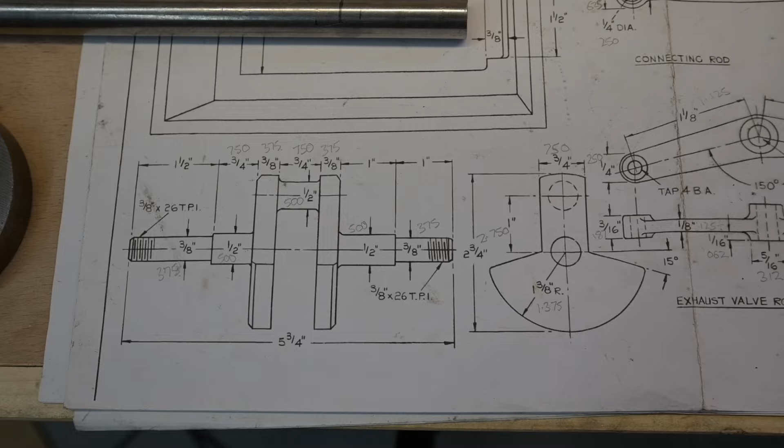Right, this is a project, or part of the project, that I've been dreading for some time. The crankshaft. This is the stock they supply. I've got to cut 1.5 inches off of the end, which forms this piece, and the rest of it will go through in one.

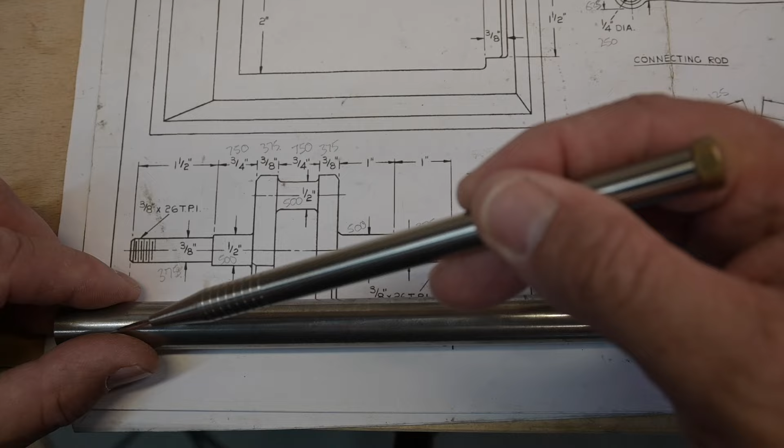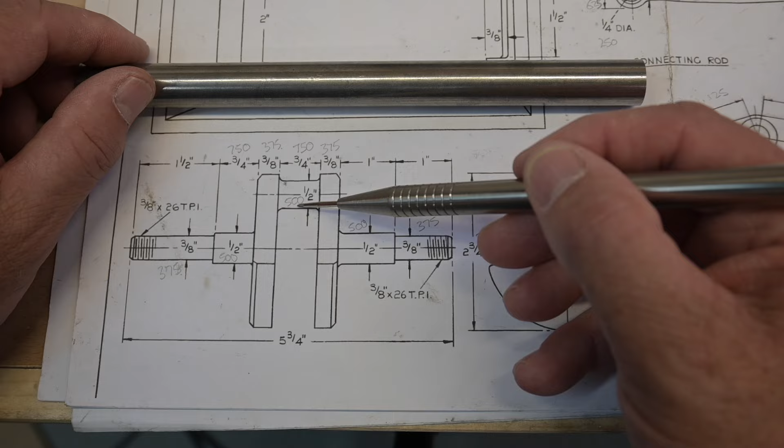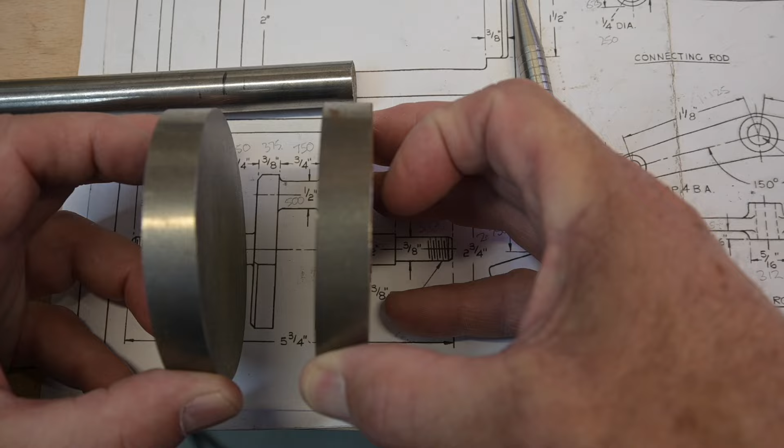Now they show these two little fillets there, which aren't going to happen, of course, purely because I won't be able to fit it together if I do it like that, unless that's the fillet of the braze that's then turned down. I can understand this one because I can leave it larger than 1/2 inch. Let's say this is the end piece, the 1.5 inches there. I'm going to leave 3/4 in the centre, turn the outside edges down to 1/2 inch, and then I can sandwich these pieces on, and that will give me my required 3/4 inch in the centre.

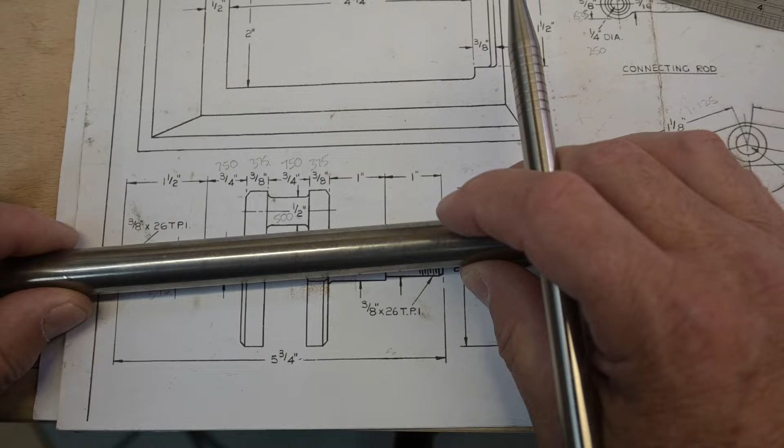Same applies to the bigger bit. I will leave 3/4 inch in the centre at full dimension, which I think is about, let's have a look, 5/8. So the full dimension is 5/8, so I'll turn it down to 1/2 inch apart from the last 3/4 in the centre, and then that will set me up a nice datum to press this together, and then I can braze it on.

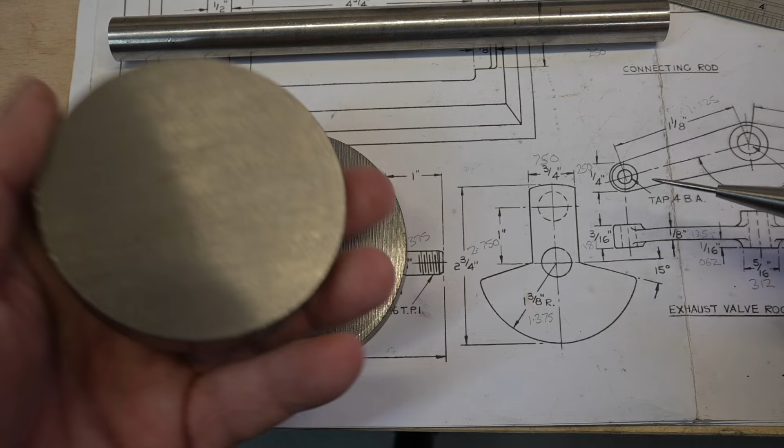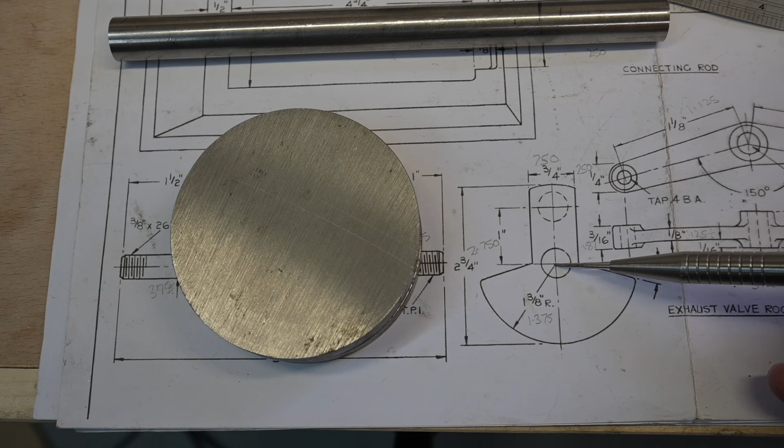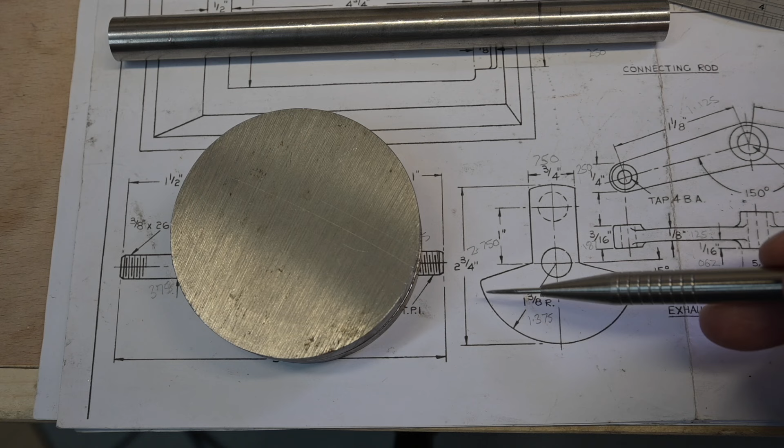But these are the two plates they send for the balance weights. So what I'm planning on doing is to just put them in the lathe, face them off, then I can sandwich them together and probably set them up in the mill, find the centre, drill out the centre 1/2 inch hole, and then another one 1 inch up, and then while it's still in the mill I can do these offset angles. I know probably the quickest way is just to hacksaw them off, but I've got to make sure they're exactly right either side to make sure the balance is correct.

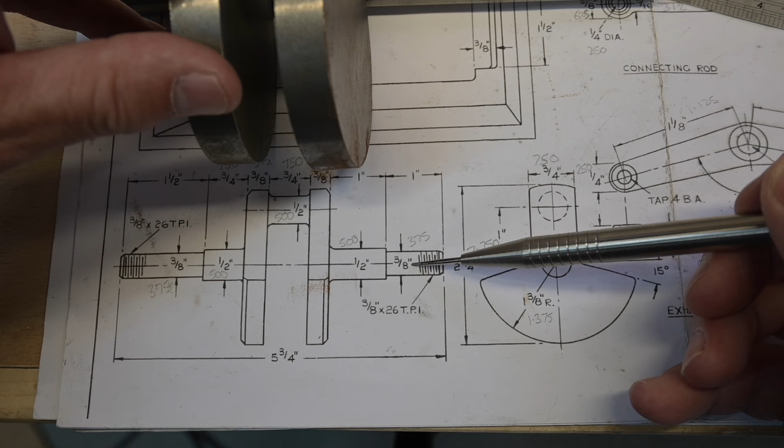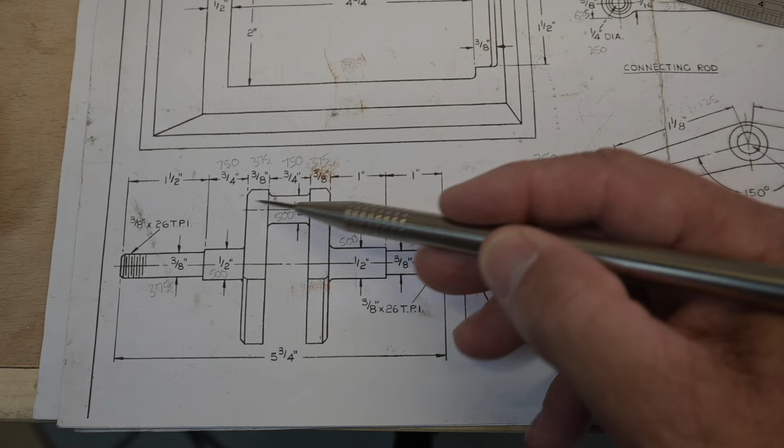So let's assume we've got these two faces machined off now. They're set up on the crankshaft, and then I'll set the crankshaft up between centres, which is how I'm going to do both of these, to keep the concentricity. So once they're set up at 3/4 in the centre and all brazed together, I'll put them back in the lathe and turn the outside. I know it's going to be an interrupted cut, but I'll just true up the outside relative to the crankshaft going through, and also face off the insides down to the dimension, because they're slightly over. Even when I've faced off one side, they'll still be slightly over, but the face side will be on the inside, and then on the outside I can machine them down to the required dimension.

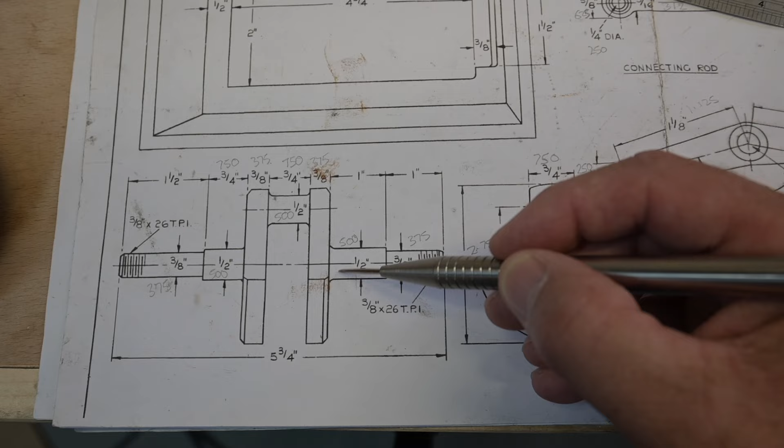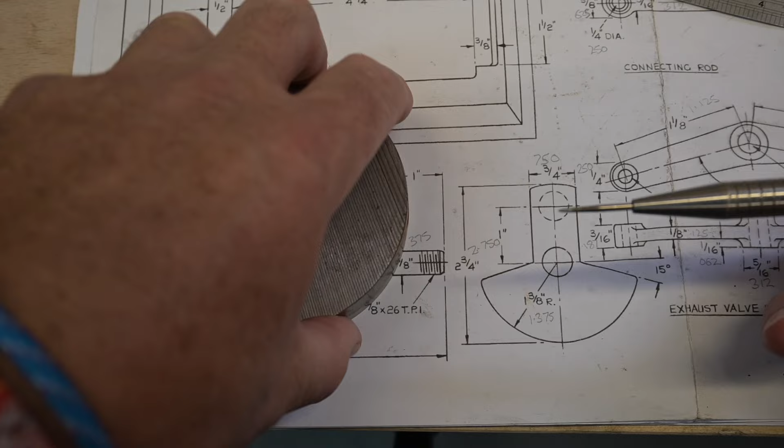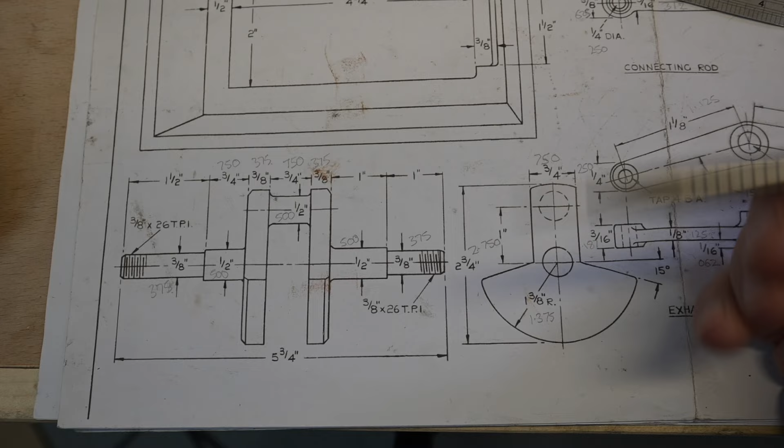That might even give me the chance for this little piece here. It's not so important there, but it is here, because that's where the bearing goes for the conrod, which is fine because I will have the surplus material there to form that one. So first process for me is to face off the two discs. I'll take these over, face those off, work out how I'm going to set them up in the mill to get these drilled and get this part machined out. Then I will be going over to the lathe to sort out the main crank and the conrod crank. So anyway, first job, over to the lathe, get these discs faced off.

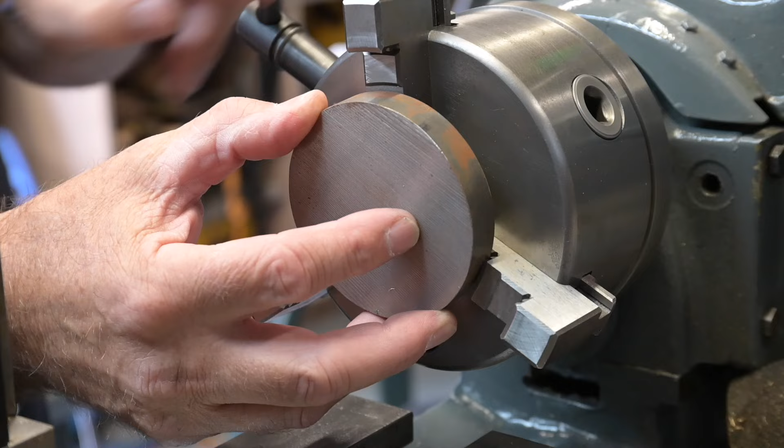Right, take two. Right, I can see what's going to happen here. There's no way that's going to grip on that, is it? Or is it? Oh, it is. What I need to be careful of here, I think, is if I come in like that, it's going to catch the jaws, so I'm going to have to just turn this at an angle. Right, let's go.

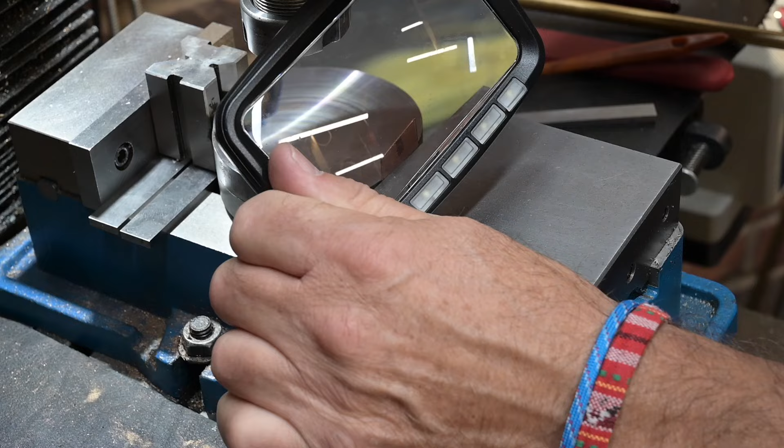Right, those two mate up quite nicely now. Turn that light off and put a torch on, I'll be able to see that better, I think. We're on the money there, we're on the centre, good. Right, lock that off.

Right, just putting a little pin in there just to stop it from moving. It shouldn't move, but that will just keep that hole aligned while I drill the next one. I go an inch in that direction, so let's get that moved an inch in the Y direction. Right, exactly 1 inch in the Y direction and locked off.

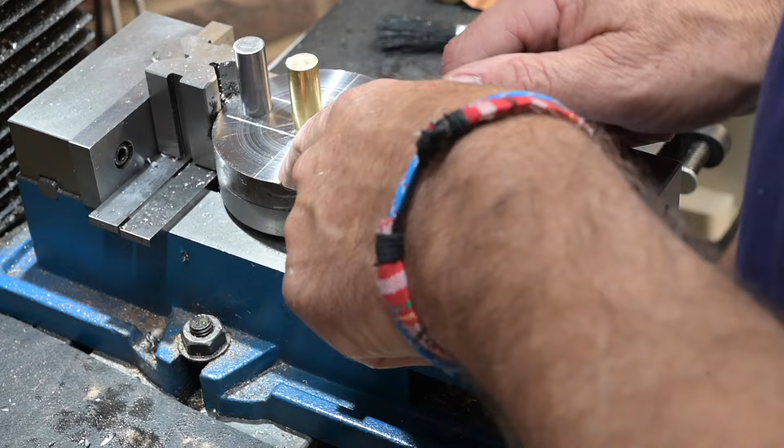Right, now got the vertical lines scribed on and some horizontal lines. I need to come 15 degrees off of the horizontal line, so I'm going to take it out of the vise and mark that with the scriber. Perfect. Right, there are two 15-degree marks. I suppose I could set it up in the rotary table with a lot of faffing about to mark this out, but I've achieved what I need to anyway.

So what I want to do now is get this bit rough cut, and then what I shall do is I'll use these two pieces here to sit that parallel back in the vise. I can then fine mill that off and then rotate it 15 degrees to fine mill this line. It'll all become clear soon. So let's just get the vise cleaned up, get this rough cut out on the bandsaw.

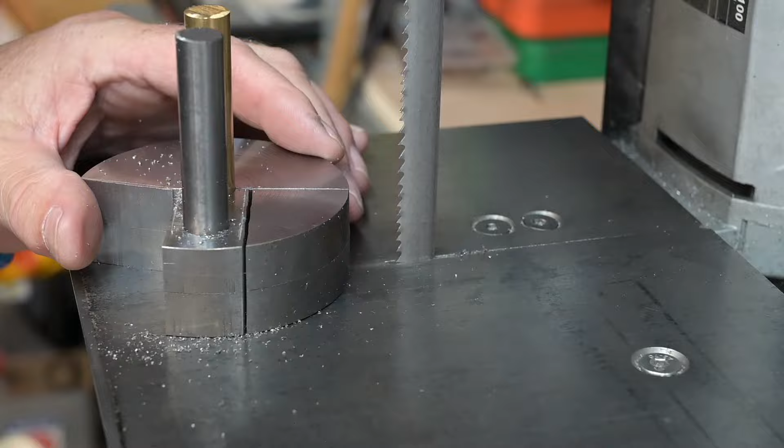Right, that's the basic shape. I'm now going to put it back in the mill and clean these up. Not necessarily down to the line, but I'm going to be able to measure from this centre point because I've got these pins in, but I'll show you that when we get over to the mill.

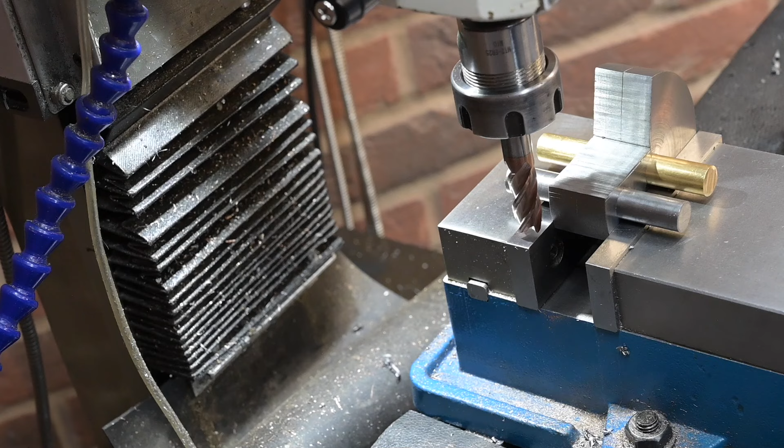What I'm going to do now is set my Z-axis down onto this feeler gauge. Right, now that's 0.05 above there. So if I zero my Z-axis and come down, move that out, come down 0.05, lock that off. Right, zero that out. Right, I've now zeroed that out. The bottom of the cutter now is touching there. Well, it's not touching there, but it is in reality. The measurement is touching there. So what I need to do now is come up 250.

That's exactly 250 up now. So the bottom of my cutter now is centre of the pin, or the pins, right? And I need to come up 375 is my finished dimension. So if I now zero the Z-axis, come up another 375. There we go, 375. Zero the Z-axis again, and I now know that when I get to that measurement I will be exactly at the correct height on there. So let's just have a look, see how it looks compared to the scribe line, shall we?

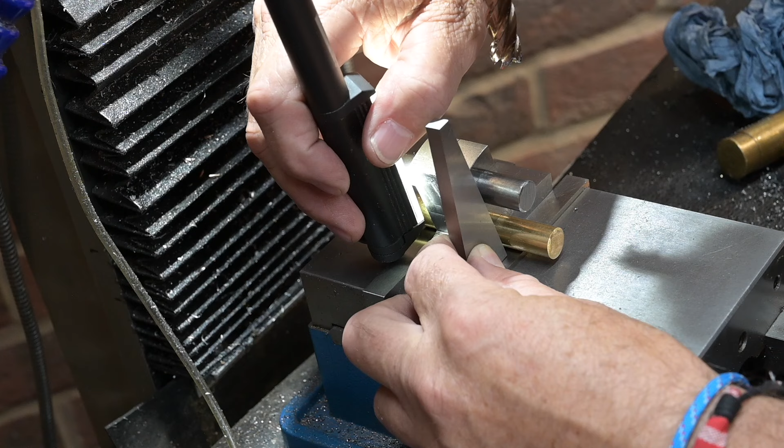Right, you can't see that, but I can, and I can see that that is bang on the scribe line, 375. So if I set the angle block on there, get my torch out, I can see them here. Right, by putting the light behind there, putting the angle block on there, which is then 15 degrees, I can set this at 15 degrees, which will then give me the angle, the 15 degrees I need here to mill this down to the line. I've got a scribe line on there, so I can mill down to the scribe line.

Right, I've got a height of 320. Got a height of 320 from there, so if I machine this down to 320 it'll match the other side.

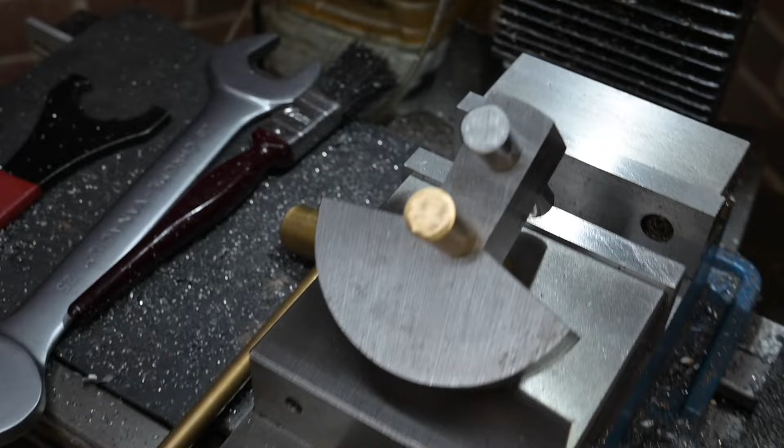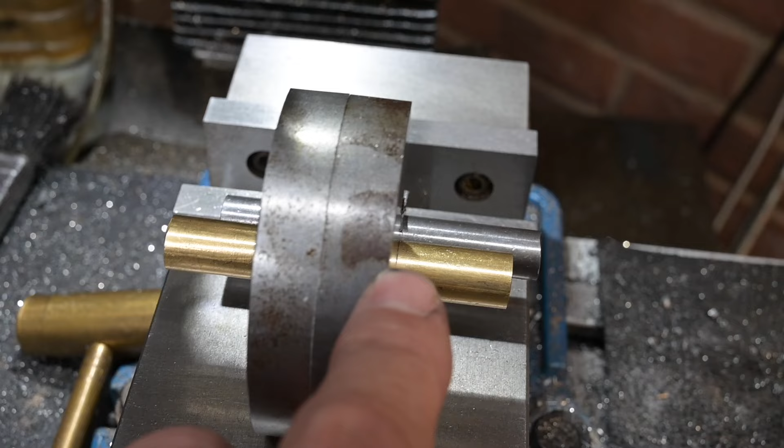Right, that's pretty much finished as far as I can go from the milling anyway. Eventually what will happen is when it's mounted on the crank through this centre pin, I'll turn it between centres to turn this circumference so it's all true, everything can be true, and also when it's on the crank, these have got to be turned down to dimension. They're too sort of fat at the moment, so they've got to be turned down to dimension.